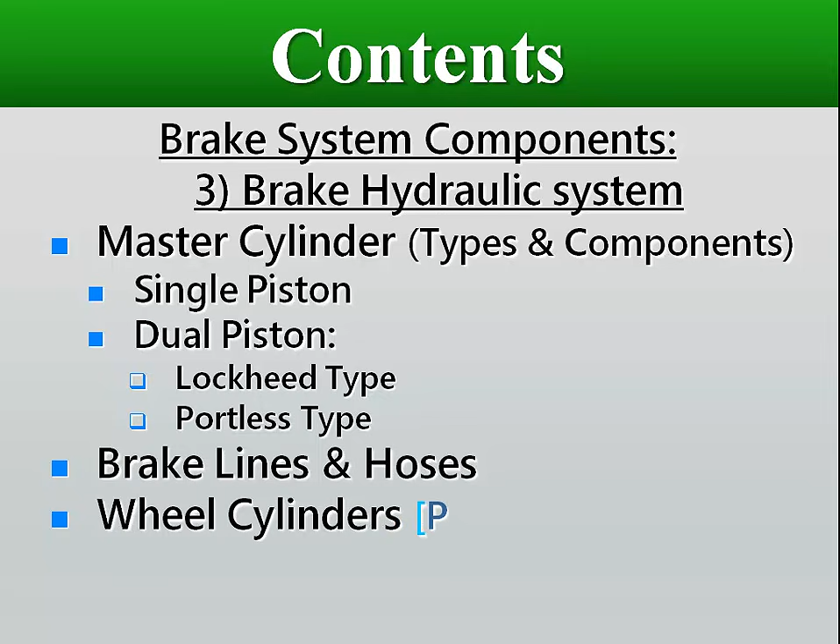Hydraulic systems are comprised of three basic parts: a master cylinder that pushes fluid through the lines that carry the fluid, and a slave cylinder that moves when fluid pressure pushes upon it.

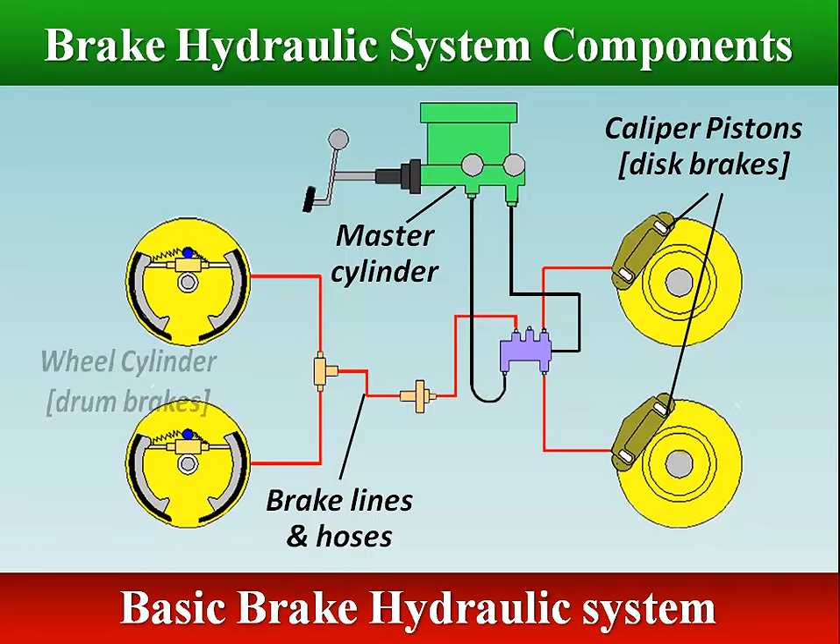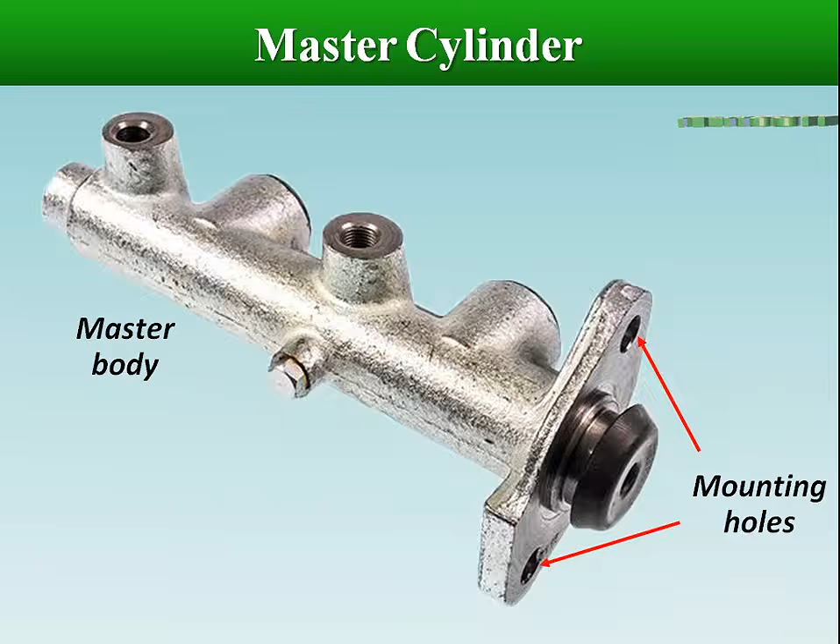The master cylinder is the heart of the entire braking system. It stores brake fluid and converts the motion of the brake pedal into hydraulic pressure. Most master cylinders are manufactured of cast iron or aluminum, and contain brackets with holes for mounting. The master cylinder is connected to the brake pedal via a push rod.

A single piston master cylinder consists of a reservoir, cylinder body, piston, and return spring.

The rubber seal of the reservoir cover allows for continuous pressure to be placed on the fluid, preventing the chance of a vacuum building inside the master cylinder reservoir.

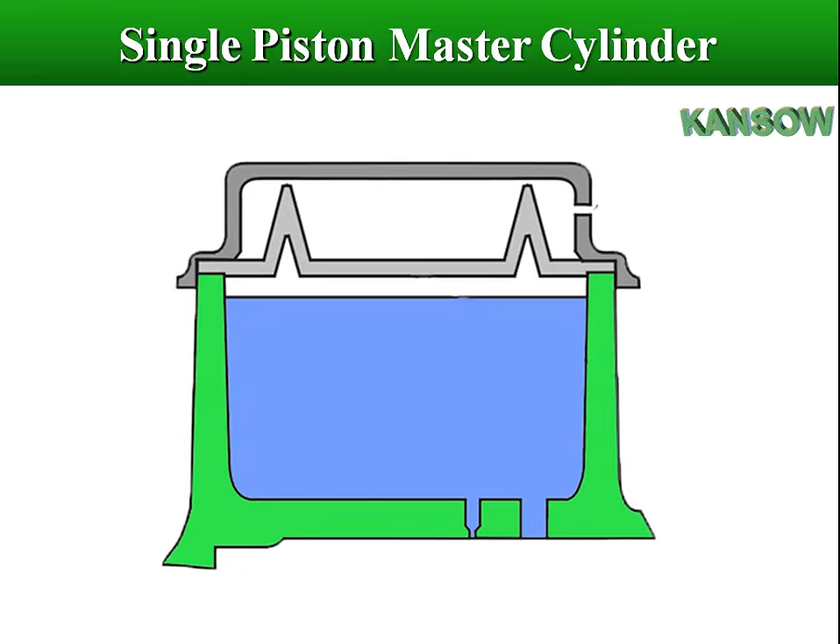Single piston master cylinders have one piston with two cups, a primary cup and a secondary cup. These cups are also known as seals.

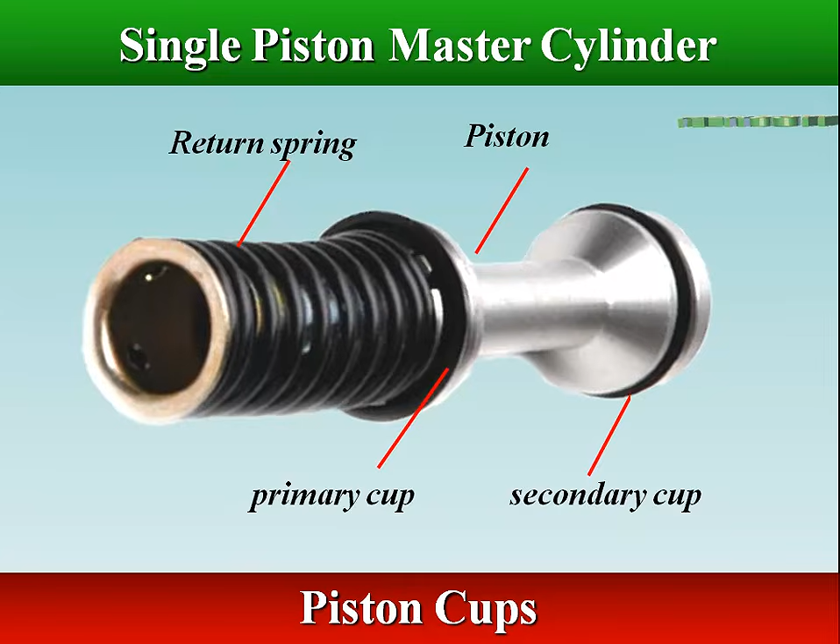When force is applied to the piston by the push rod, the primary cup seals the pressure in the cylinder, while the secondary cup prevents loss of fluid past the rear end of the piston.

An inlet port connects the reservoir with the space around the piston and between the piston cups. A compensating port connects the reservoir to the cylinder, just barely ahead of the primary cup. An outlet port links the cylinder to the brake lines.

The compensating port adjusts for changes in the volume of the brake fluid ahead of the piston. This occurs due to the expansion or contraction of the brake fluid as it heats up or cools down.

As the push rod from the brake pedal moves the piston forward, the compensating port is closed off, trapping brake fluid ahead of the primary cup. Fluid trapped in the cylinder is then forced from the master cylinder outlet port into the brake lines.

When the brakes are released, the master cylinder piston returns to its original position by action of the spring. When the piston fully returns against its stop, the primary cup uncovers the compensating port, and fluid ahead of the primary cup can now return to the reservoir.

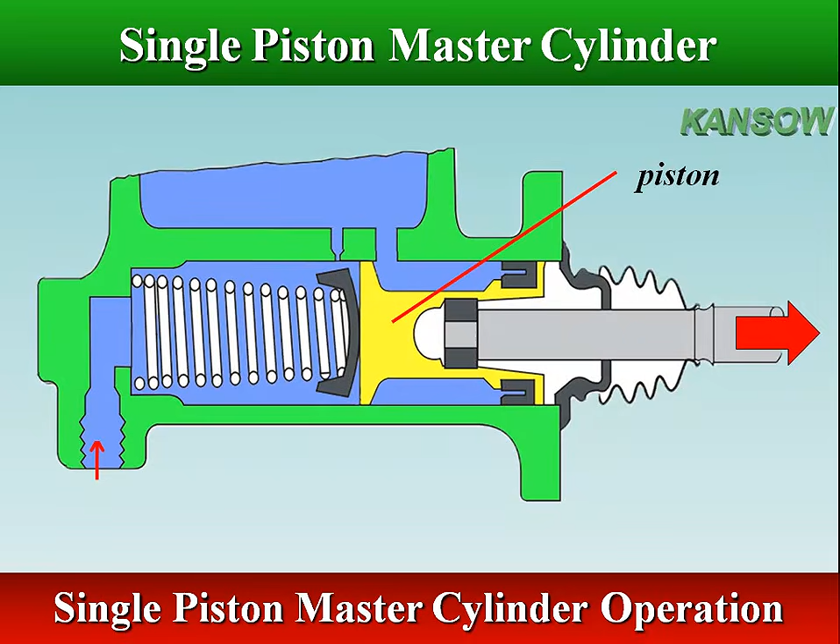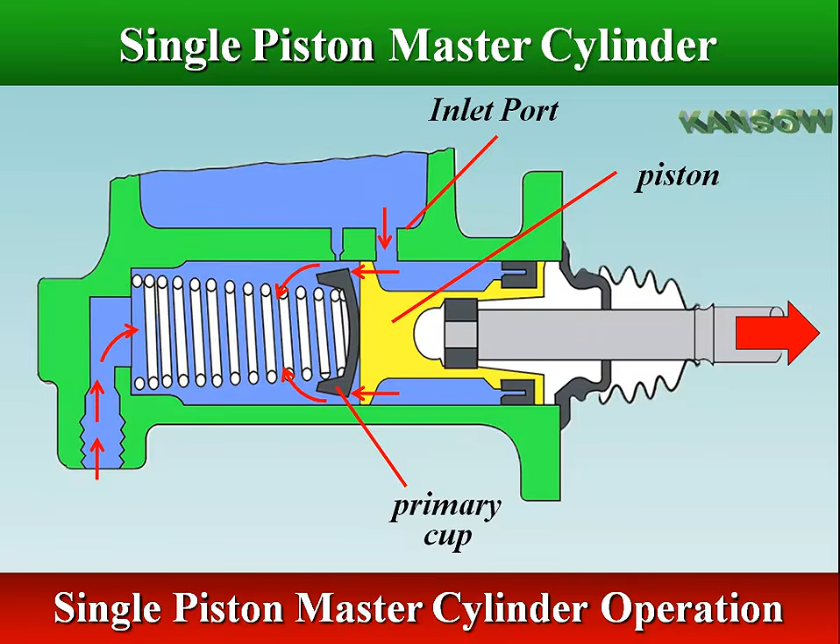When the brake pedal is released quickly, the piston returns back quickly, but the brake fluid cannot return as quickly to the cylinder, creating a low pressure area ahead of the primary cup. To prevent a vacuum from being created, fluid can pass from the reservoir into the working chamber, through the inlet port and small holes drilled in the piston land and around the primary cup seal. This is called recuperation.

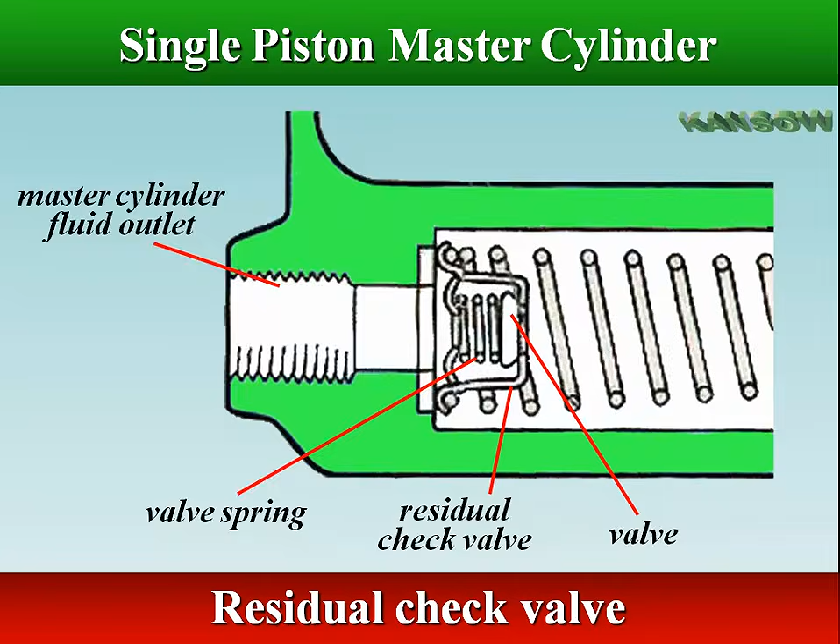When the fluid in the lines returns to rest, its pressure is held slightly above atmospheric pressure by a valve called the residual check valve, located at the outlet end of the master cylinder. The residual pressure helps stop air from entering at the wheel cylinder, and it keeps fluid from leaking out.

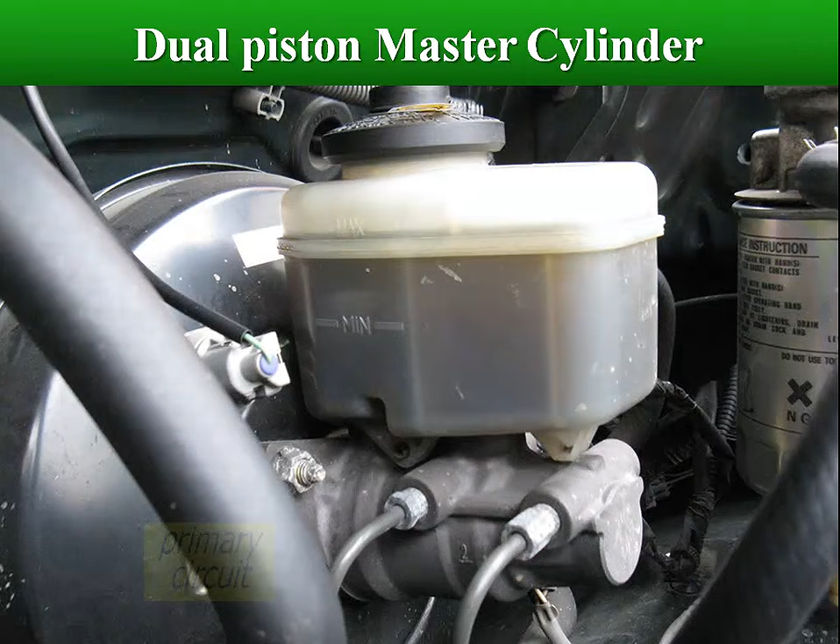The tandem master cylinder has two separate hydraulic chambers. This creates, in effect, two separate hydraulic braking circuits. If one of these circuits becomes inoperative, the other circuit can still function to stop the vehicle.

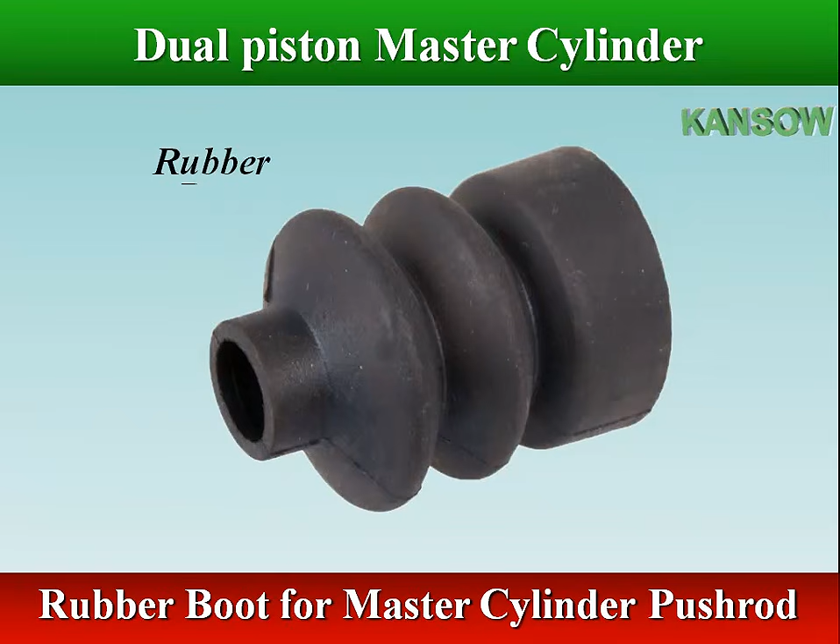The rubber boot for the master cylinder push rod prevents dust, dirt, and moisture from entering the back of the master cylinder. The master cylinder consists of the reservoir tank, which contains the brake fluid, and the pistons and cylinder which generate the hydraulic pressure.

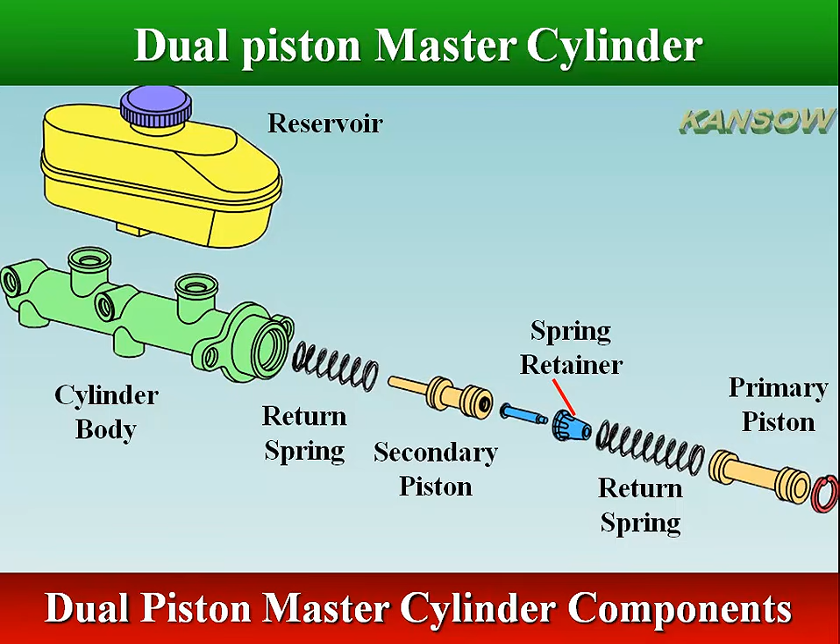The reservoir tank stores an extra supply of brake fluid, cast as part of the housing or added as a removable plastic part. The reservoir diaphragm lays directly on top of the brake fluid, which helps keep air from the surface of the brake fluid, because brake fluid easily absorbs moisture from the air.

There can be two separate fluid reservoirs for the primary and secondary chambers.

A tandem master cylinder having a single reservoir tank has a separator inside that divides the tank into front and rear parts. The two-part design of the reservoir ensures that if one circuit fails due to fluid leakage, the other circuit will still be available to stop the vehicle.

The tandem master cylinder has a single bore separated into two separate chambers by the primary and secondary pistons. This creates, in effect, two separate hydraulic braking circuits.

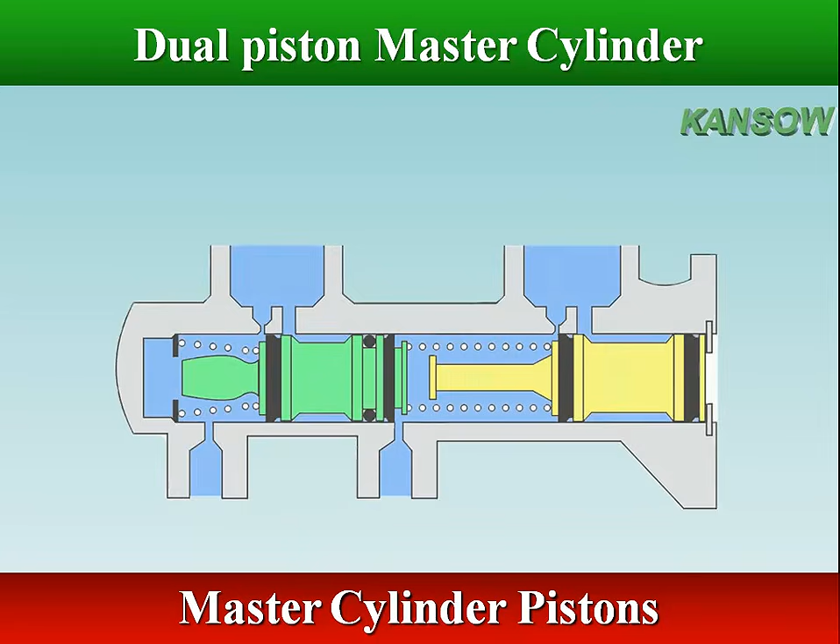Both piston assemblies rest in the cylinder. The primary piston assembly is retained by a snap ring in the end of the cylinder, and the secondary piston assembly is retained by a stop plate.

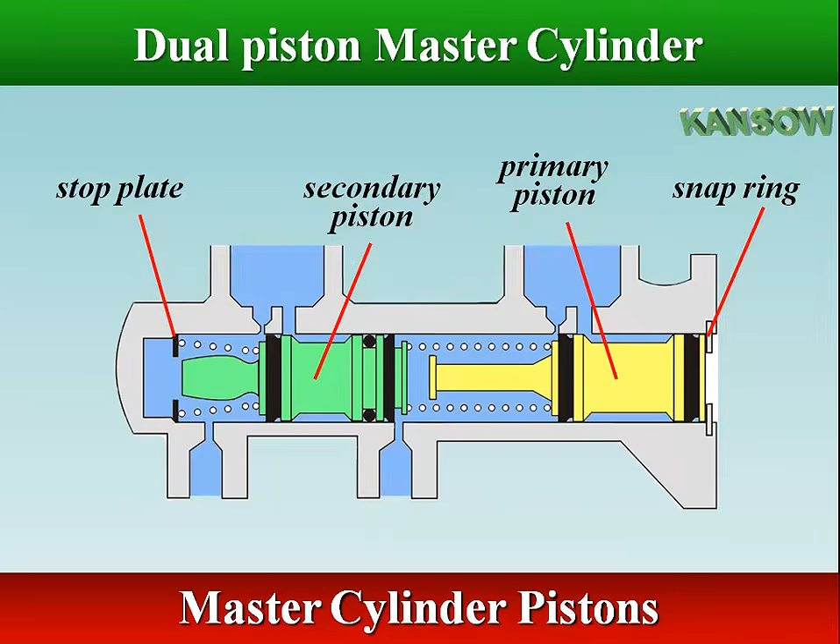Pistons and cups are used to pressurize the system. When they are pushed forward, they trap fluid and build pressure.

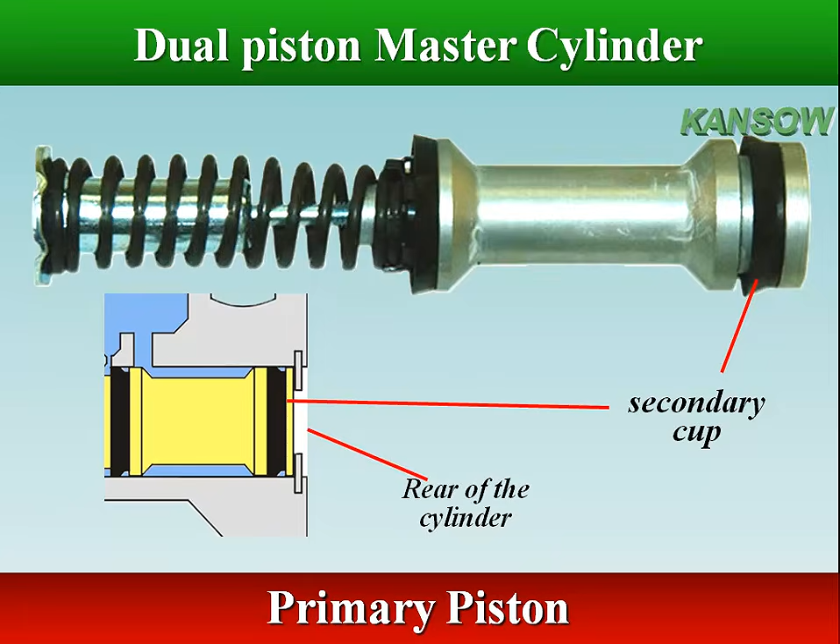The primary piston is acted on by the push rod. At the front of the primary piston is a rubber primary piston cup, which seals the primary circuit of the cylinder. At the rear of the primary piston is a secondary piston cup, which prevents brake fluid from leaking out of the rear of the cylinder. The inner piston head has several small bleeder ports that pass through the head to the base of the rubber primary cup.

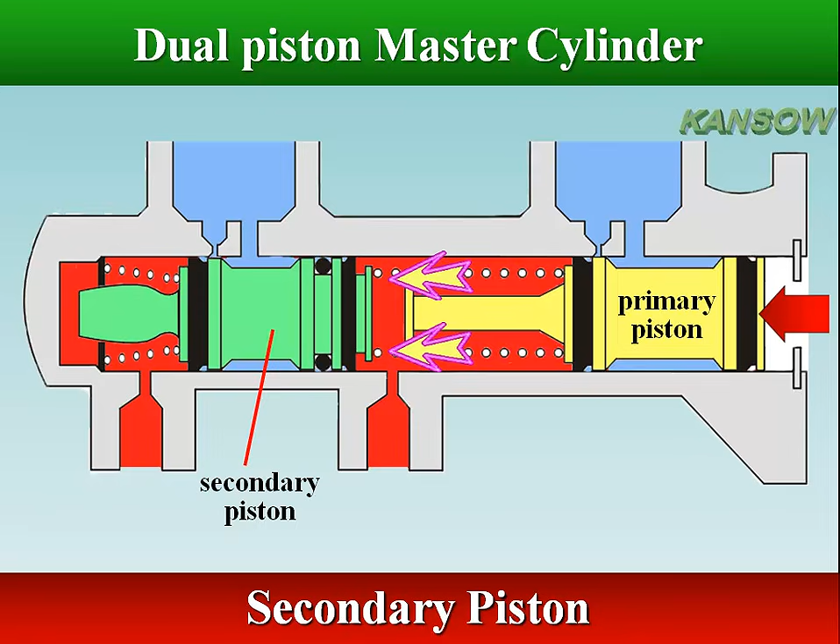The secondary piston is acted on by hydraulic pressure generated in the primary circuit when the brake is applied. At the front of the secondary piston is a primary piston cup which seals the secondary circuit, and at the rear are two secondary piston cups, which seal the secondary chamber cylinder from the primary chamber cylinder.

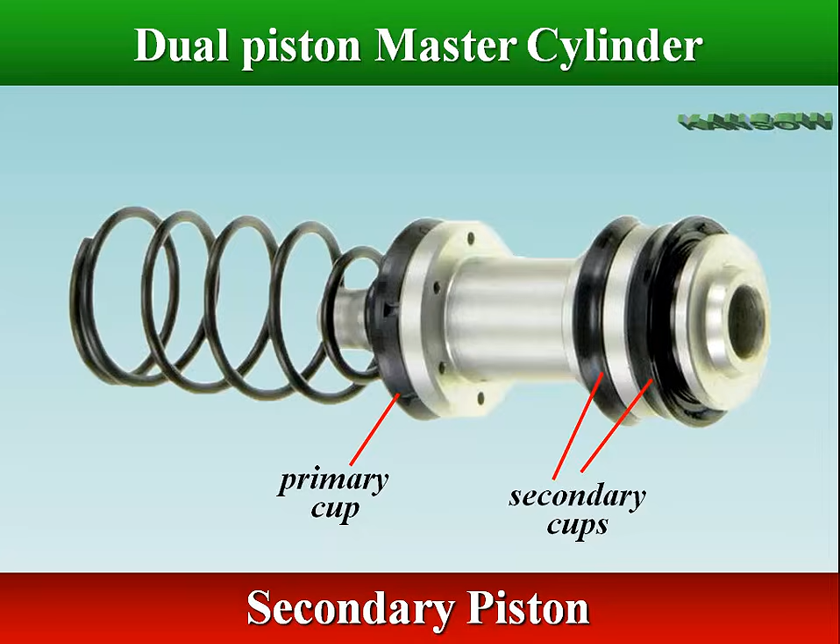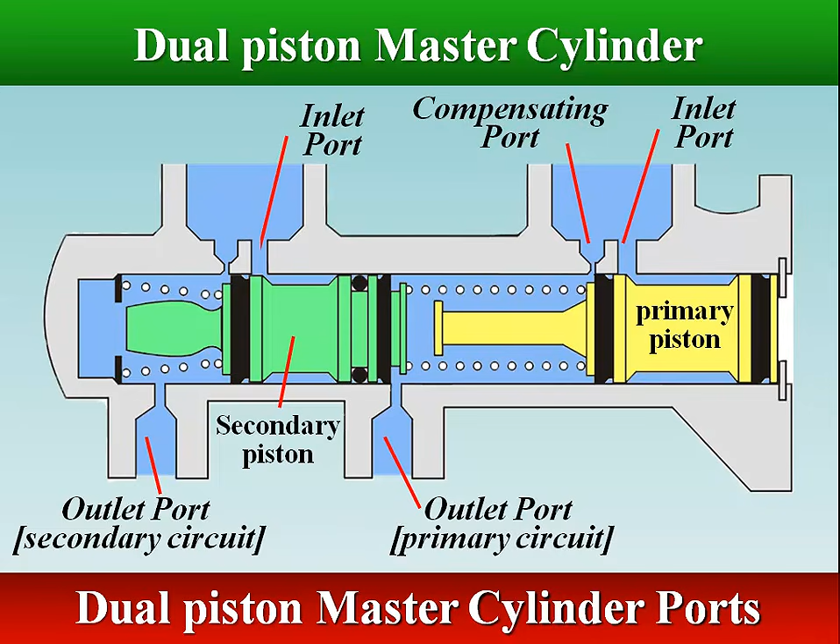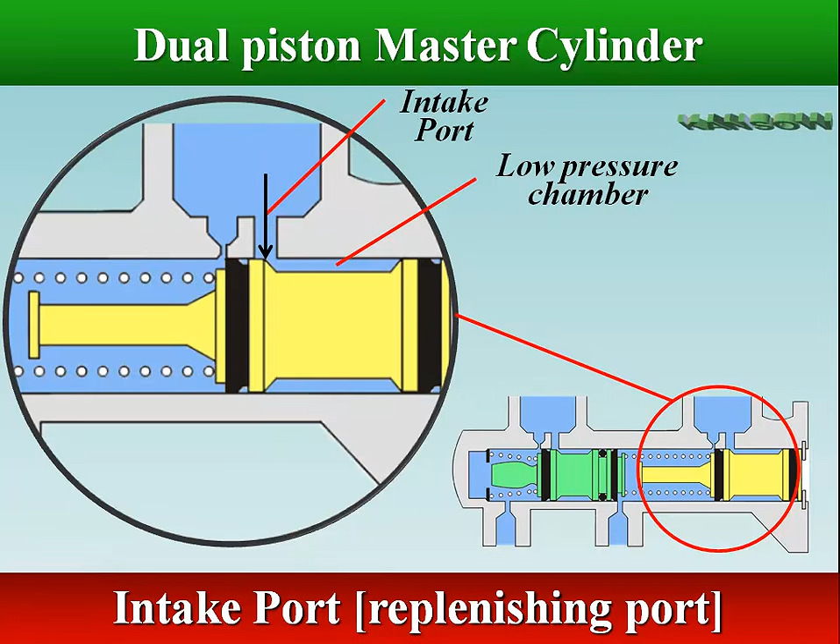Each piston of the master cylinder has an inlet port, compensating port, and outlet port. The intake port is the low-pressure rearward, larger diameter, straight drilled hole which is always open to the reservoir. It is also called the replenishing port, bypass port, filler port, or breather port. The intake port allows fluid from the reservoir to fill the low-pressure chamber, keeping the volume behind the front piston land filled with brake fluid as the piston moves forward during a brake application.

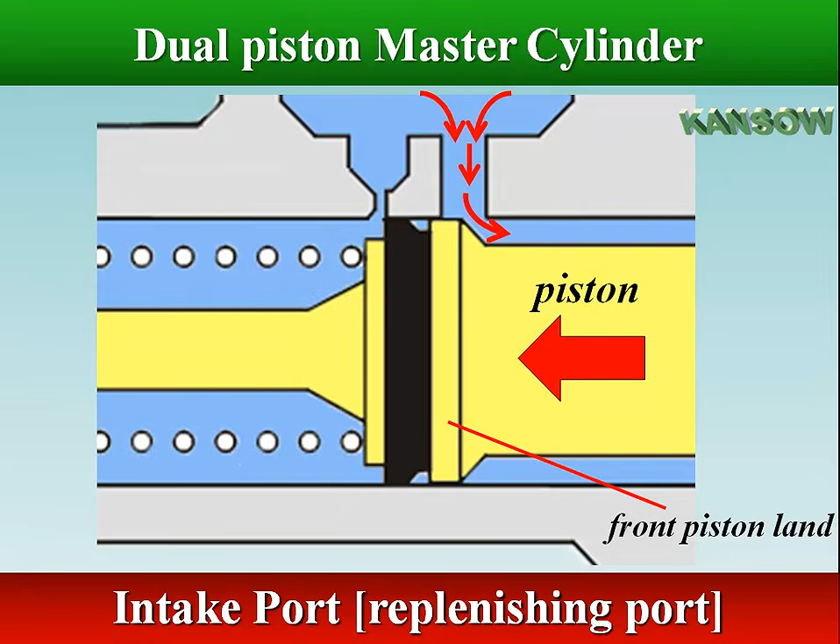The compensating port is the forward tapered hole, also called the vent port or high-pressure port. It allows fluid to flow into the chamber when the brake pedal is not depressed, and allows fluid to return to the reservoir when the brakes are released. The compensating port also absorbs any changes in brake fluid volume due to temperature changes.

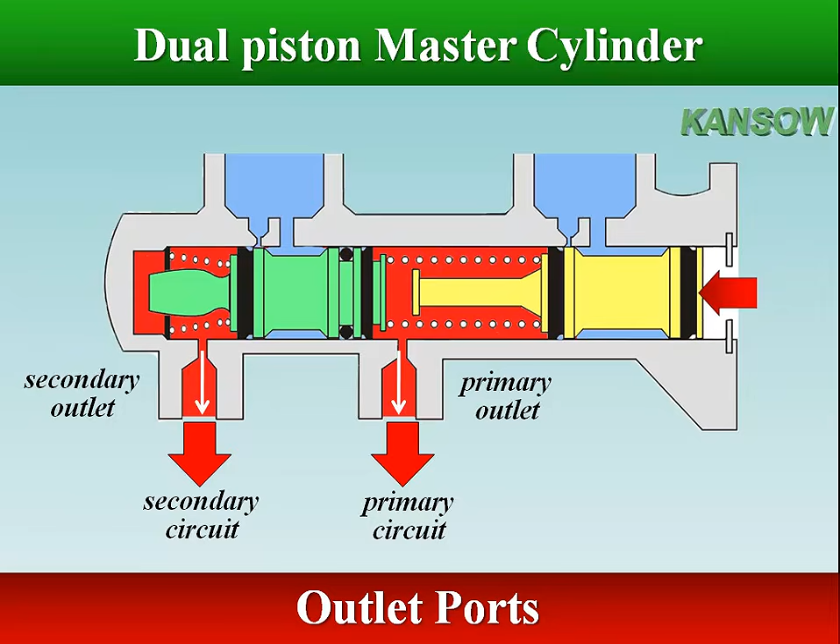The primary outlet is the outlet closest to the pushrod end of the master cylinder, and the secondary outlet is closest to the nose end of the master cylinder.

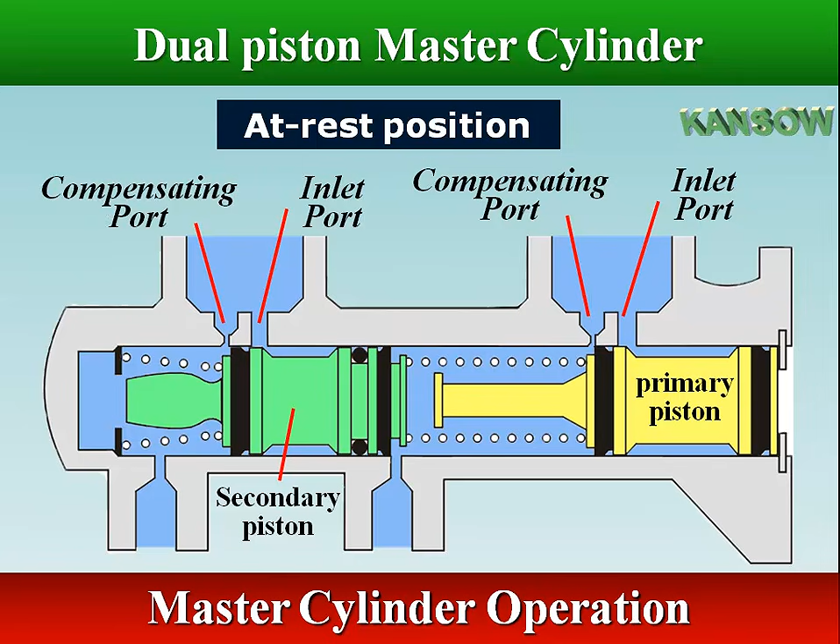When the brakes are not applied, the piston cups of the primary and secondary pistons are positioned between the inlet port and the compensating port. This provides a passage between the cylinder and the reservoir tank.

When the brake is applied, the primary piston moves forward and blocks off its compensating port, sealing the fluid in front of it. As the piston continues to move forward, it transmits fluid pressure to the primary circuit and to the base of the secondary piston. This causes the secondary piston to move forward, block off its compensating port, and apply pressure to the secondary circuit.

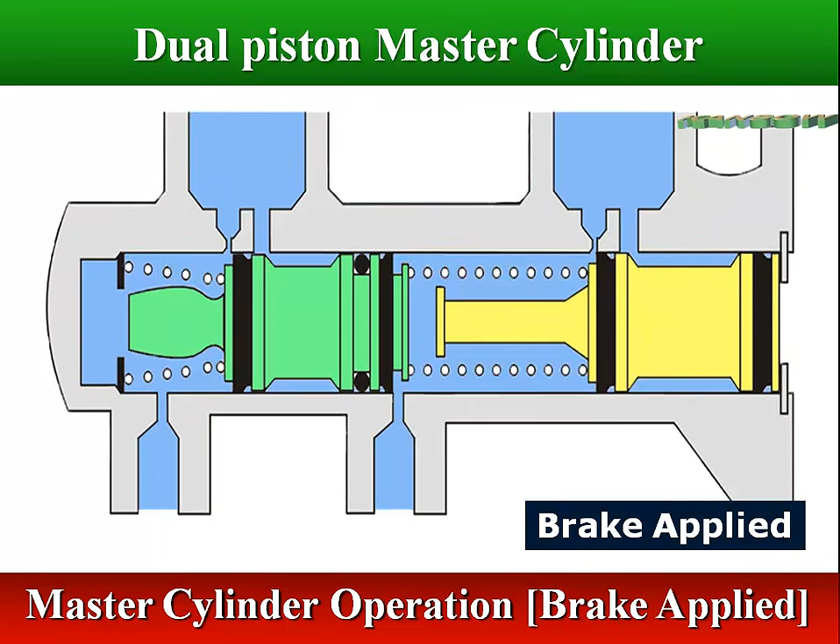When the brake pedal is released, the pistons are moved rearward by hydraulic pressure and the force of the return springs. As the pistons start to move outward in the cylinder, they move faster than the fluid can return through the lines. This creates a mild vacuum in the pressure chambers, and fluid will flow through the bleeder holes in the head of the pistons. This fluid will bend the lips of the cups away from the cylinder wall, and fluid will flow into the cylinder ahead of the pistons.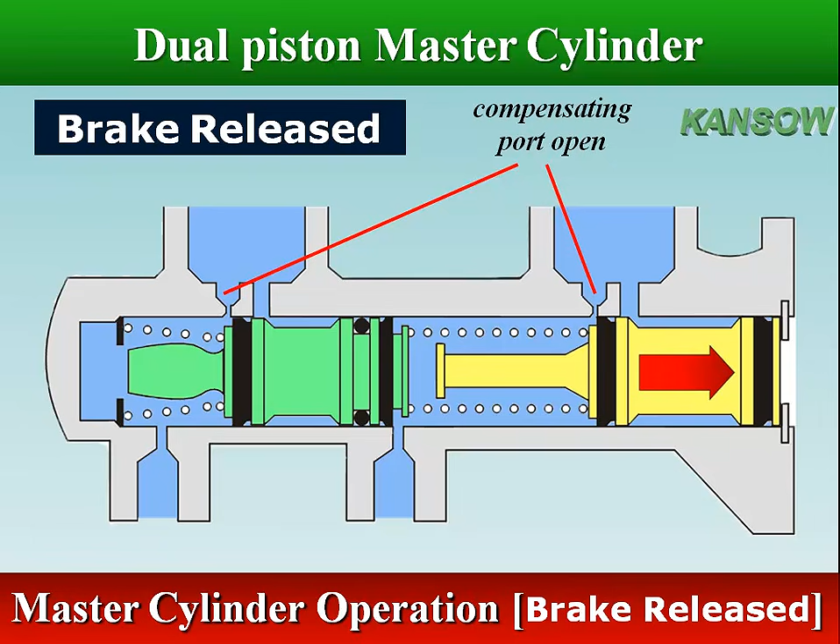This action also allows brakes to be pumped up, that is, the repeated application of the pedal in quick movements. As the pistons return to their fully released position, the primary cups uncover the compensating ports, and any excess fluid will flow into the reservoir.

If there is a failure in the secondary circuit, the hydraulic pressure in the primary chamber easily forces the secondary piston to the left, compressing the return spring. The secondary piston advances until it reaches the far end of the cylinder. The primary piston will then apply normal pressure to the primary circuit.

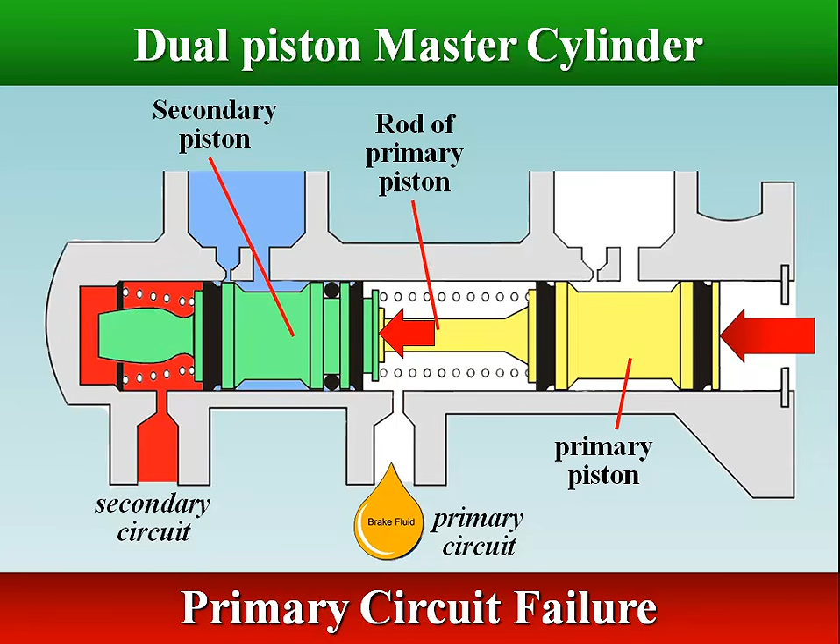If the primary circuit fails, additional pedal movement will cause the rod attached to the front of the primary piston to mechanically move the secondary piston forward, transmitting normal brake pressure to the secondary circuit.

Lockheed type master cylinders use a compensating port on both the secondary and primary circuits. A new style master cylinder is used on late model vehicles equipped with ABS and ABS traction control.

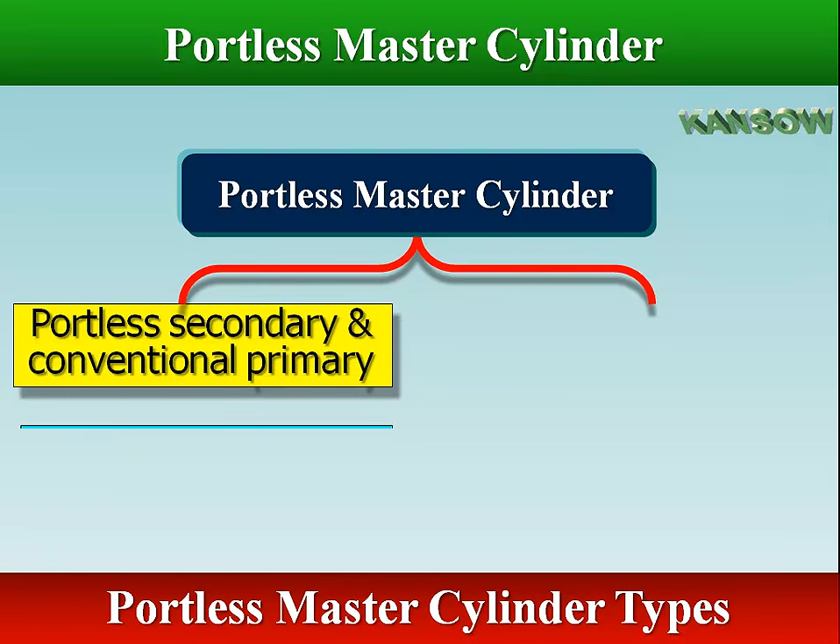A portless ABS master cylinder design does not use a compensating port on the secondary circuit, so there is a non-restrictive single passage from the reservoir to the secondary piston. The primary piston still uses a compensating port and an inlet port.

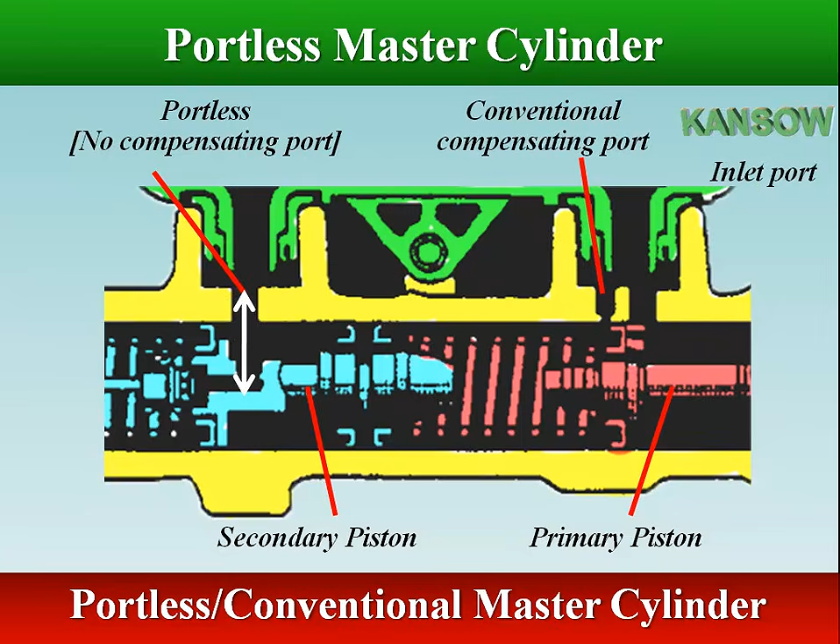The secondary piston provides a machined passage to the secondary circuit which is controlled with a center valve that controls the opening and closing of a supply port drilled into the piston. This supply port replaces the compensating port in a normal master cylinder. Portless cylinders utilize a valve assembly in the pistons that opens to equalize pressure when the brakes are released.

At rest position, the supply port is open and connects the reservoir with the secondary brake circuits. When the brakes are applied, the primary piston moves and closes its compensating port. Brake fluid pressure in the primary circuit rises and acts with the primary piston spring to move the secondary piston forward. The secondary piston moves and the center valve closes the supply port. When the piston moves further, hydraulic pressure is created in the secondary circuit.

When the brakes are released, the springs in the master cylinder push both pistons back. The supply port is open and thus the center valve creates a passage between the valve head and the secondary piston. Through this small passage brake fluid can flow back to the reservoir.

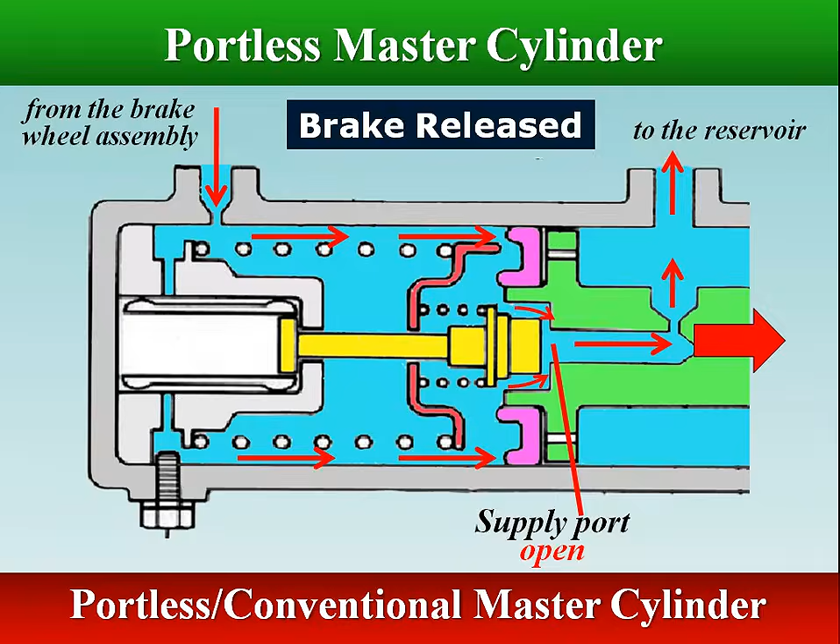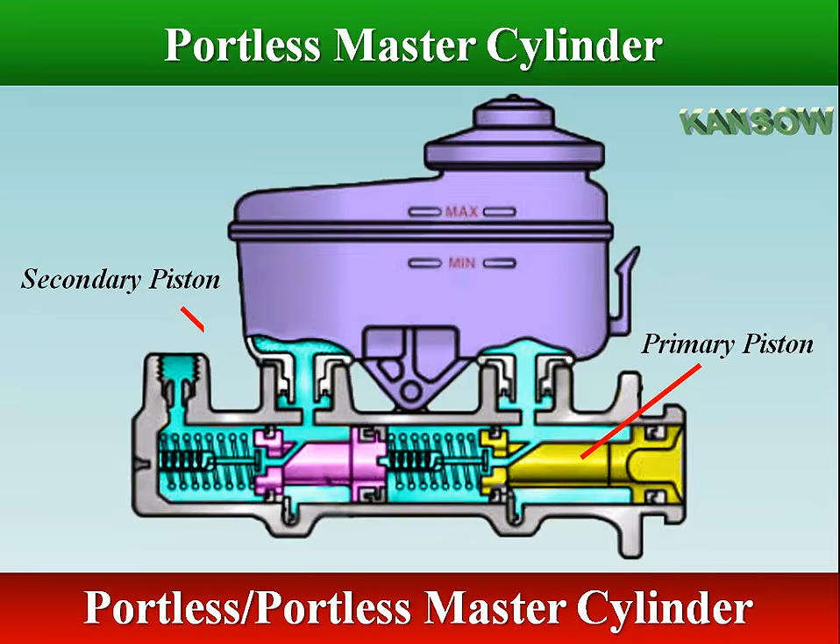Portless ABS traction control master cylinder design does not use a compensating port on both the primary and secondary circuits. Each of the primary piston and the secondary piston have a center valve.

Brake hydraulic components are connected by a network of seamless steel tubes and hoses, which transfer fluid pressure from the master cylinder to the wheel brake assemblies.

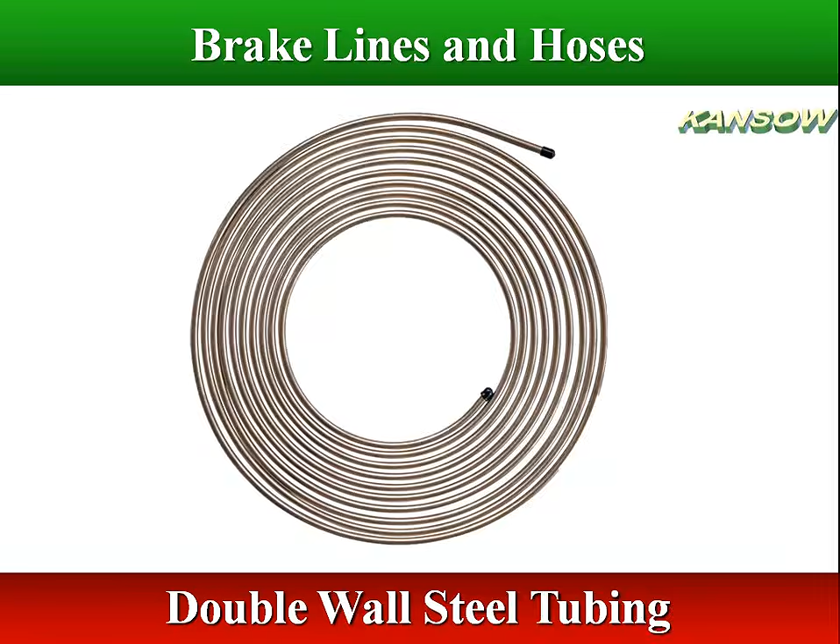The brake lines are made of double-wall steel tubing, copper plated and lead coated to prevent rust and corrosion. Each end of brake tubing is a double-lap flare, fitted with a flare nut. The tapered seats and double flare tube provide a compression fitting to seal the connection.

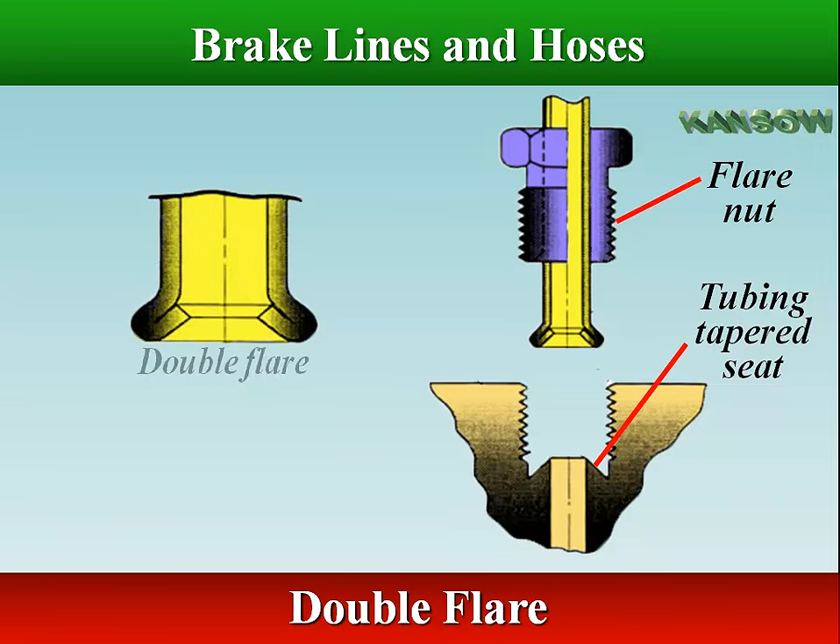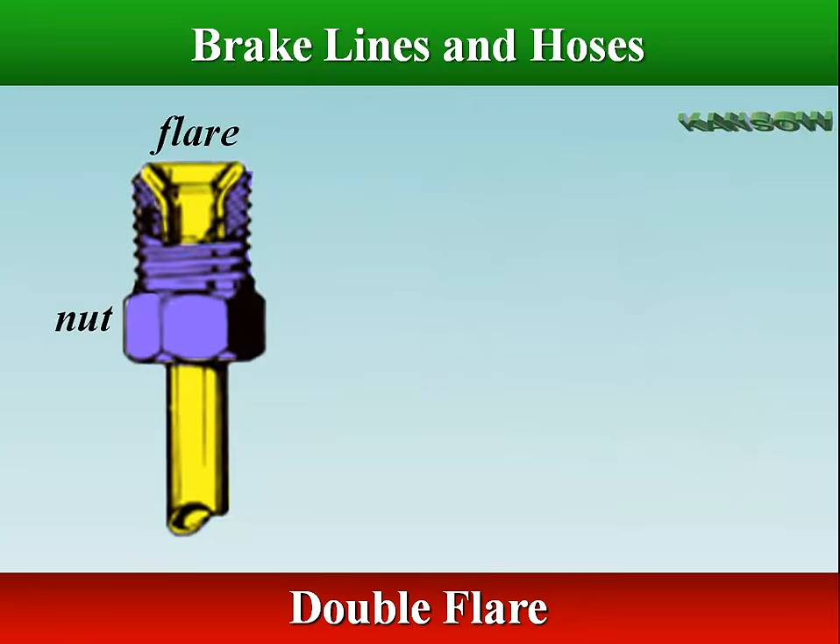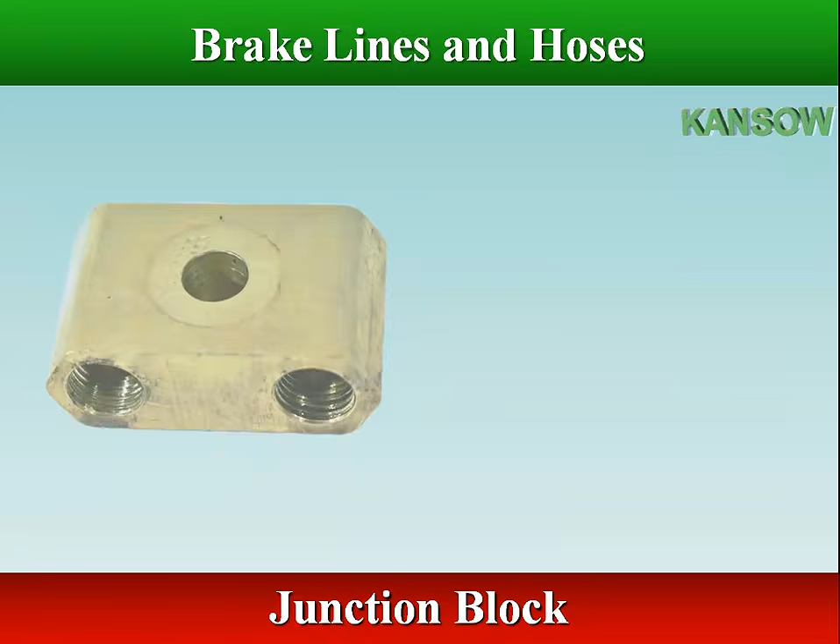A junction block is used where a single brake line must feed two wheel cylinders or calipers. It is simply a hollow fitting with one inlet and two or more outlets.

Rubber brake hoses are used where a flexing action is required. For example, a brake hose is used between the frame and the front wheel cylinders or disc brake calipers. This design allows the wheels to move up and down, as well as side to side, without damaging the brake line.

Mounting brackets and clips are used to secure brake lines and hoses to the body or frame of the vehicle, to prevent damage from vibration.

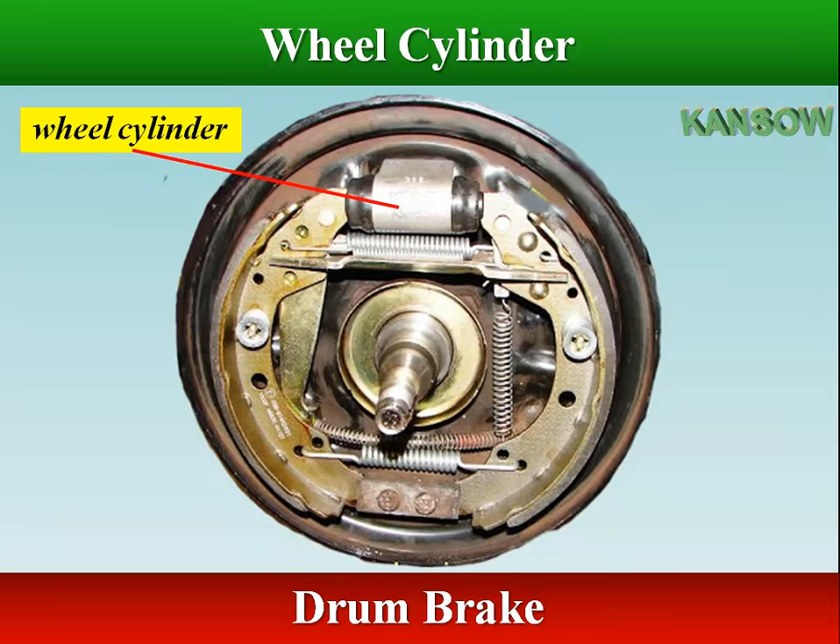A wheel cylinder is a component in a hydraulic drum brake system, located in each wheel. The wheel cylinder is usually positioned at the top of the backing plate, above the shoes.

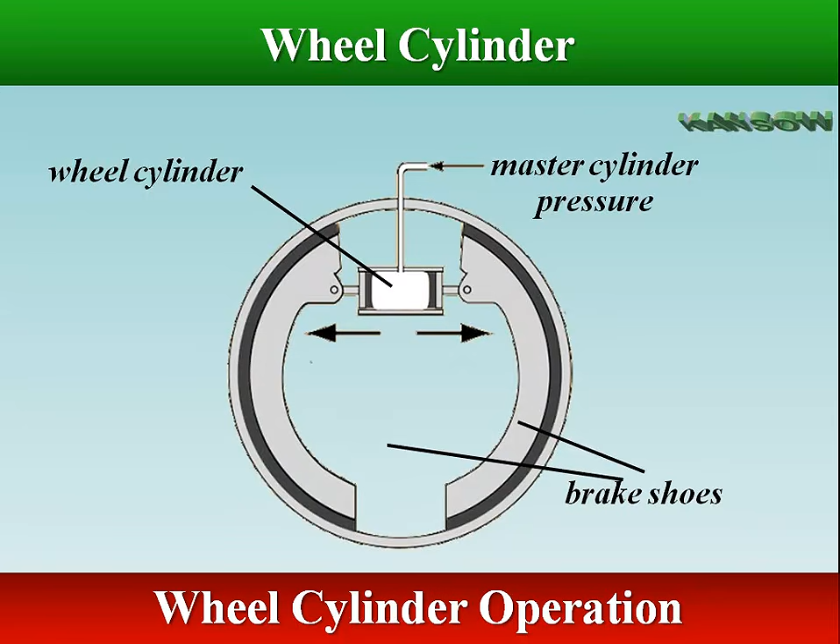The wheel cylinder uses master cylinder pressure to force the brake shoes out against the drum, and stop the vehicle with friction.

On the back of each wheel cylinder there is a threaded hole for the brake line, and a bleeder valve that can be loosened to bleed air from the hydraulic system.

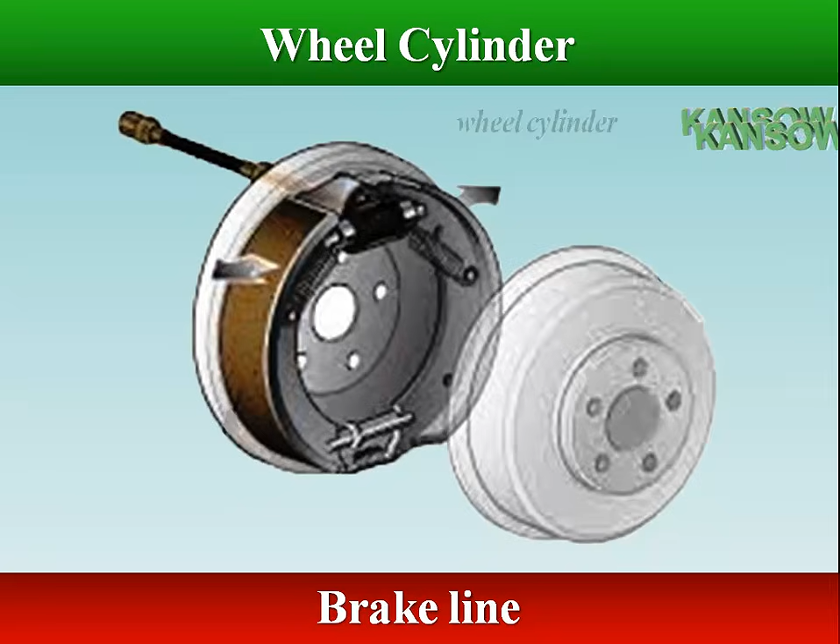The wheel cylinder is bolted or clipped to the backing plate.

The wheel cylinder consists of a cylinder housing, pistons, rubber cups, spring and cup expander assembly, dust boots, and bleeder screw.

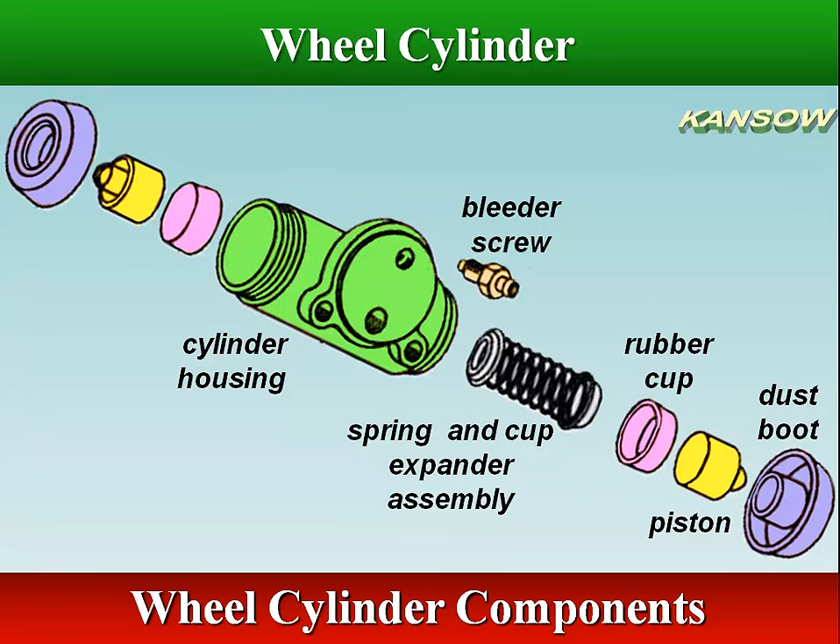The wheel cylinder housing encloses all the other parts of the assembly. It has a precision cylinder in it for the pistons, cups, and spring.

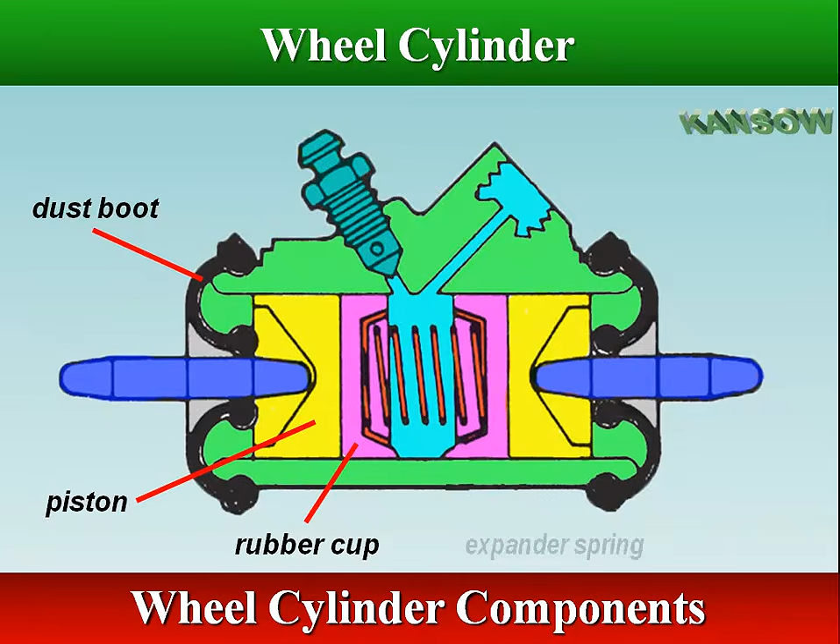Wheel cylinder has two pistons, one on each side. Each piston has a rubber seal and a shaft, or push rod, that connects the piston with a brake shoe.

The wheel cylinder cups are special rubber seals that keep fluid from leaking past the pistons. They fit in the cylinder and against the pistons.

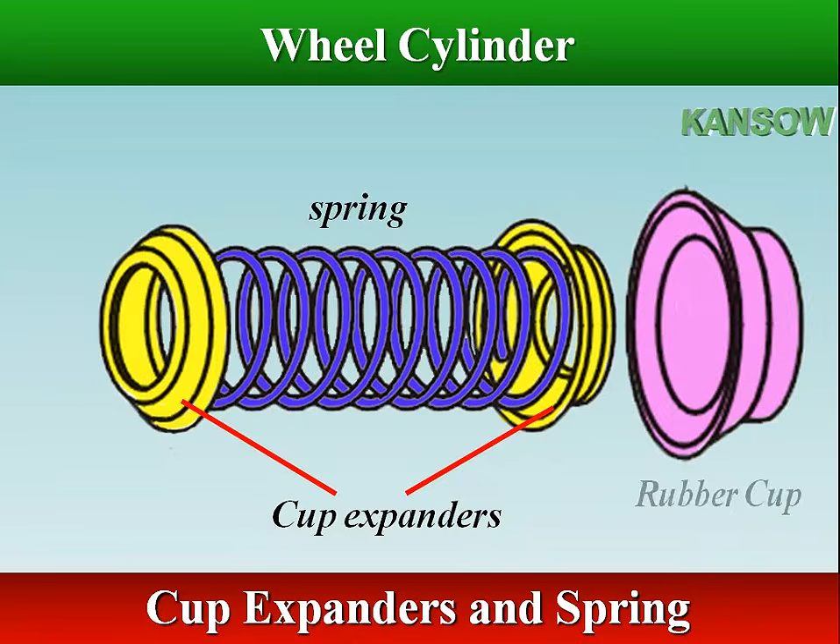The expander spring assists in holding the rubber cups against the pistons when the assembly is not pressurized. Cup expanders maintain pressure on the lips of the cup seal, keeping air, dirt, and moisture out of the system.

The dust boots keep road dirt and water from entering the cylinder. They snap into grooves that are cast on the outside of the housing.

The push rods are held in place by the rubber dust boots. As the wheel cylinder pistons move outward, the push rods transfer the movement to the brake shoes.

The bleeder screw is usually positioned to be the highest point on the cylinder. This aids in bleeding air from the system.

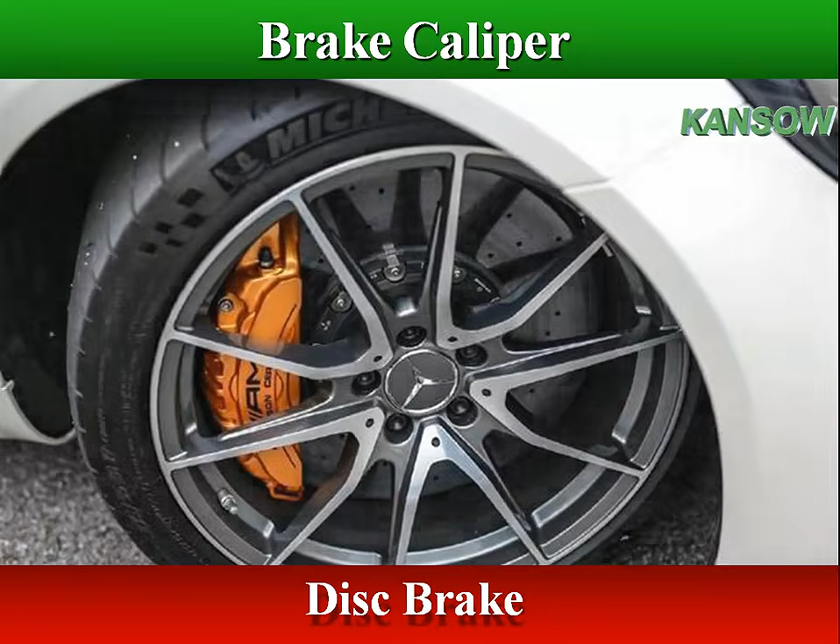The caliper is the part of a disc brake that squeezes the pads against both sides of the rotor, when the brake is applied.

Disc brake caliper assembly is bolted to the vehicle axle housing or suspension.

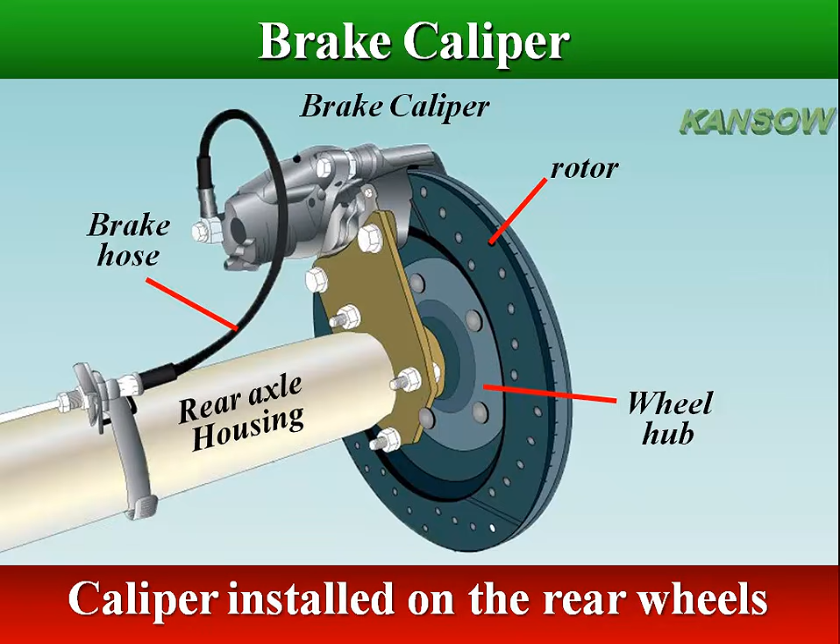Brake calipers have two functions in a motor vehicle: they house and guide the brake pads, and they provide the hydraulic actuation.

They house and guide the brake pads, ensuring every time you apply the brakes, the brake pads are in the right position to move onto the rotor.

Brake calipers provide the hydraulic actuation that converts brake fluid pressure into mechanical movement, enabling the braking action.

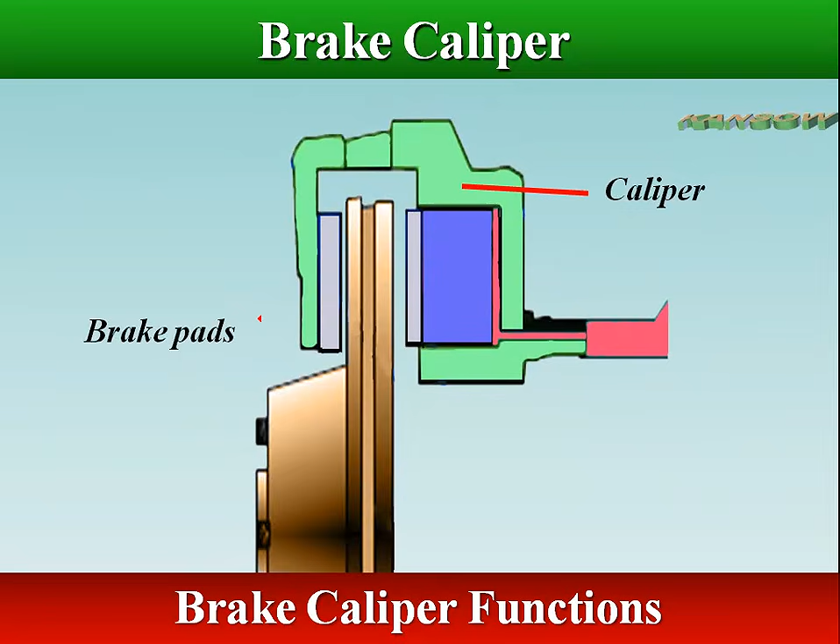While there are several designs for brake calipers, the most common type is the floating caliper. The floating caliper has two main sections: caliper bracket and caliper body.

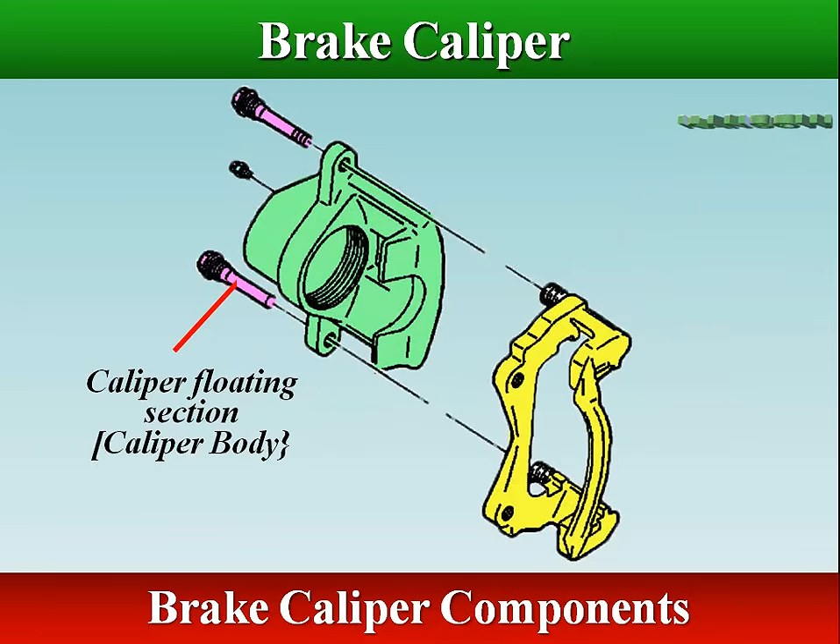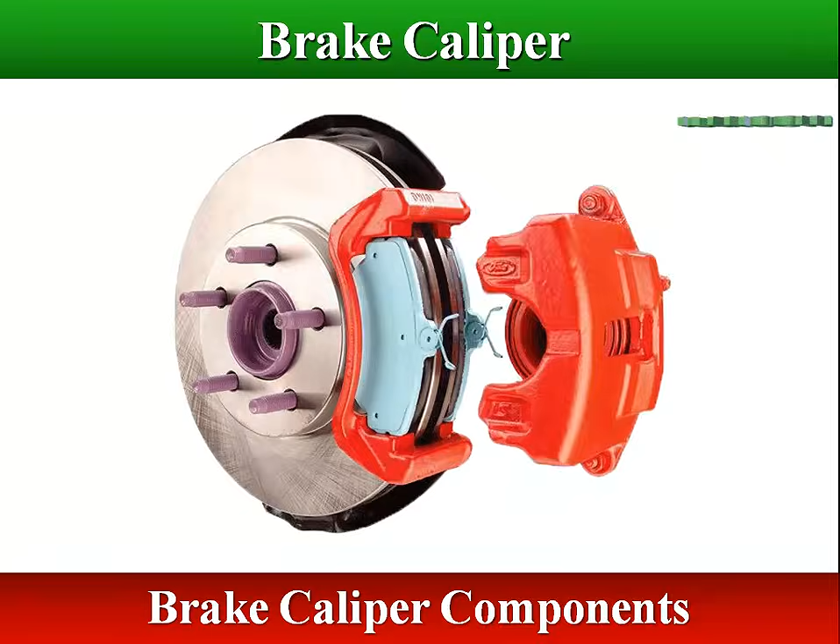The floating caliper bracket solidly mounts to a suspension component with two bolts.

The floating section is bolted to two pins called slide pins or guide pins, that let it slide freely from side to side, float.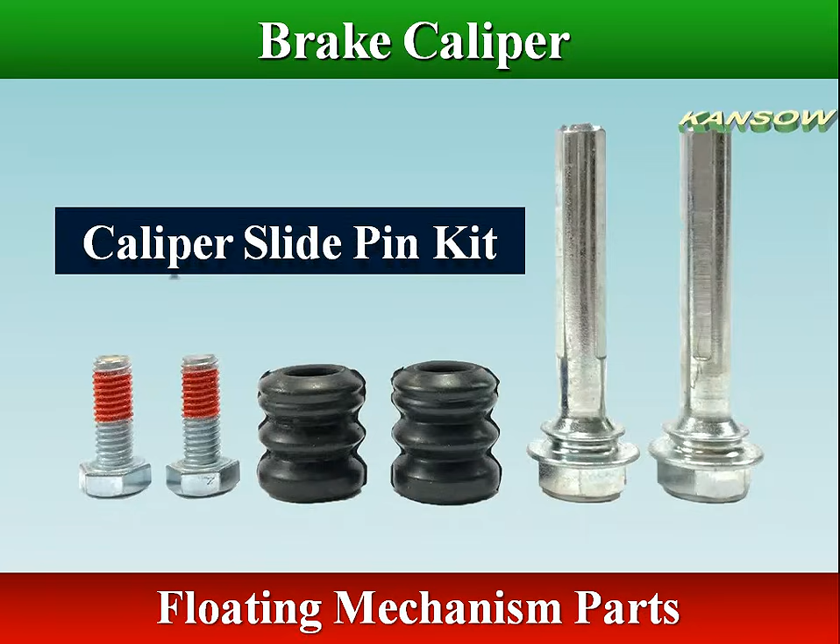The floating mechanism provides a gap between the brake pad and the rotor, and it includes sliding pins which are supported by rubber bushings. The mechanism is used to retain and locate floating calipers.

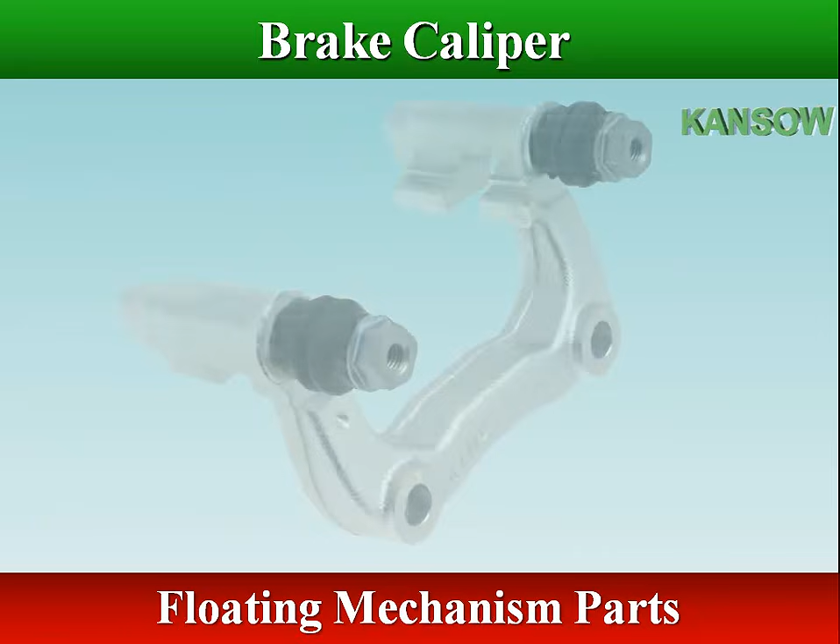The sliding pins are greased and allow for proper alignment of the caliper to the brake rotor, and still allow for the movement needed under normal driving.

The slide pin boot's job is to keep water, sand, and dirt away from the slide pin bores, and helps keep the special grease inside.

The slide pin reciprocates in the bushing during operation of the brakes, and the bushing moves along the bore as the brake pads wear.

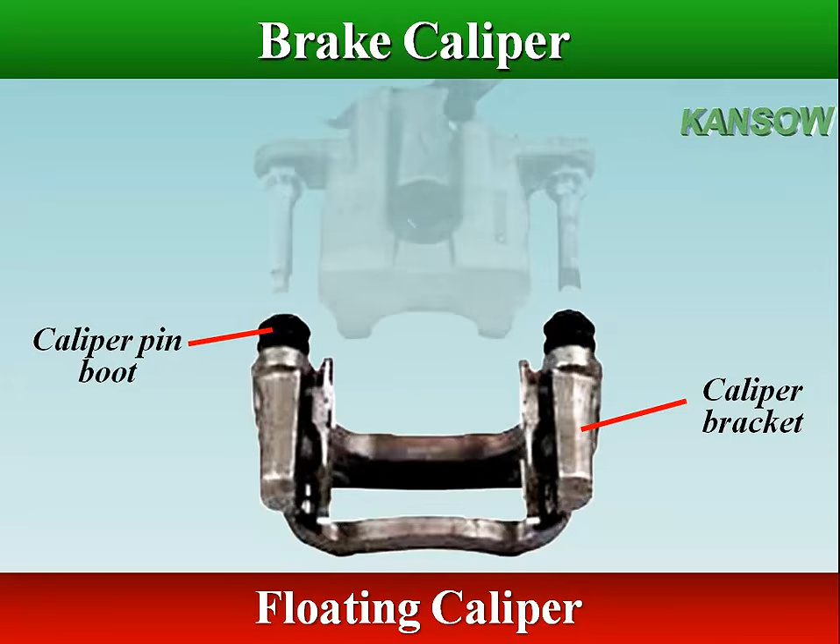The brake caliper body is composed of caliper housing, piston, square cut seal, dust boot, and bleeder screw.

The caliper body holds all of the parts of the brake caliper together, and floats to allow both application of the brake pads as well as the ability to release the brakes.

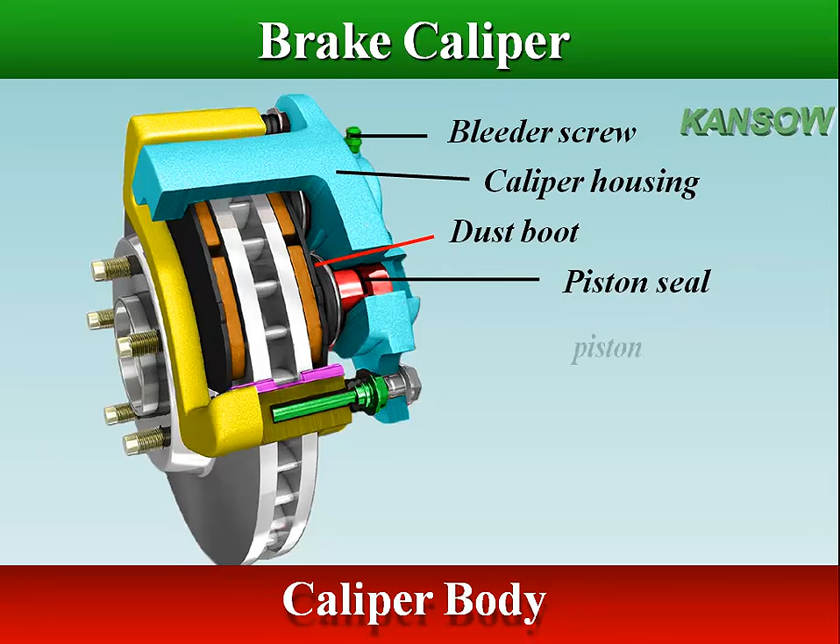Caliper cylinder is a machined hole in the caliper housing. The piston fits into this cylinder.

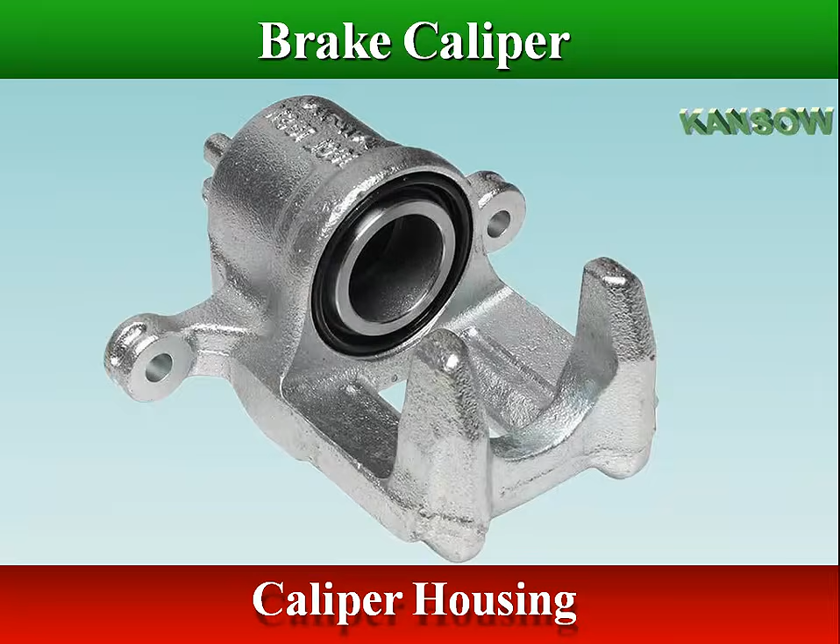The caliper cylinders have grooves machined into their surfaces to hold seals.

The caliper cylinder is connected to the hydraulic brake line system.

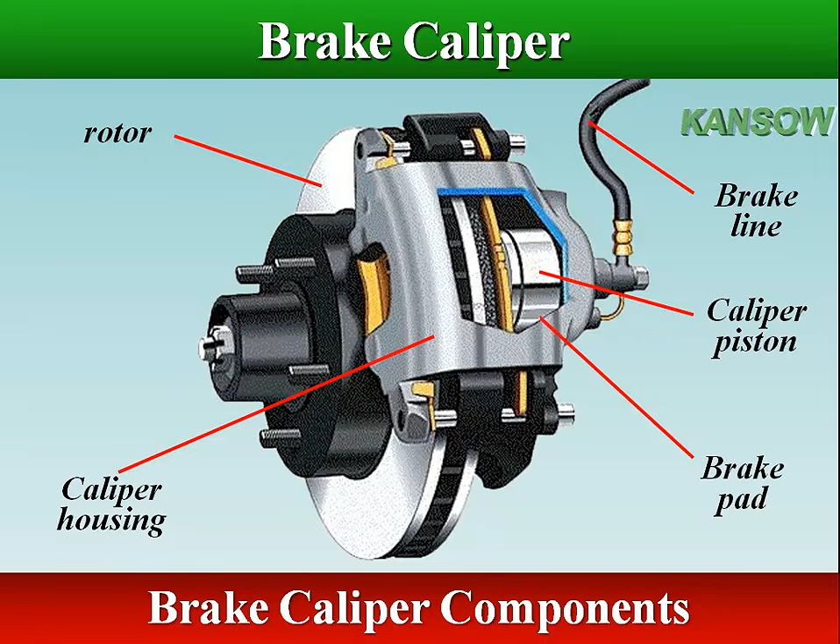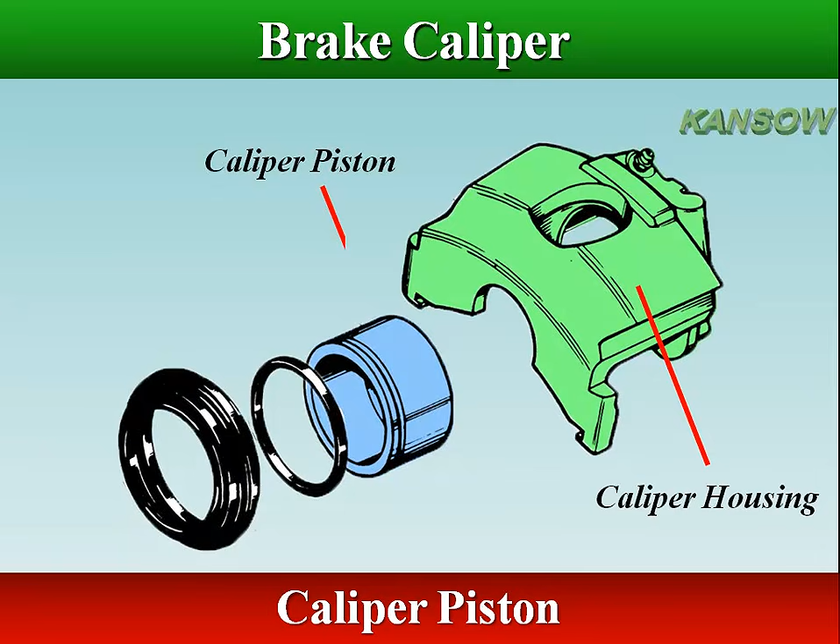Floating caliper has one or more pistons, located on the inboard side of the caliper. When the brake is applied, the piston is pushed by the brake fluid to close the gap between the brake pads and the brake rotor.

Caliper pistons may be aluminum, steel, or phenolic plastic.

The square-cut O-ring not only seals hydraulic brake fluid, but also retracts the caliper piston when the brake pedal is released.

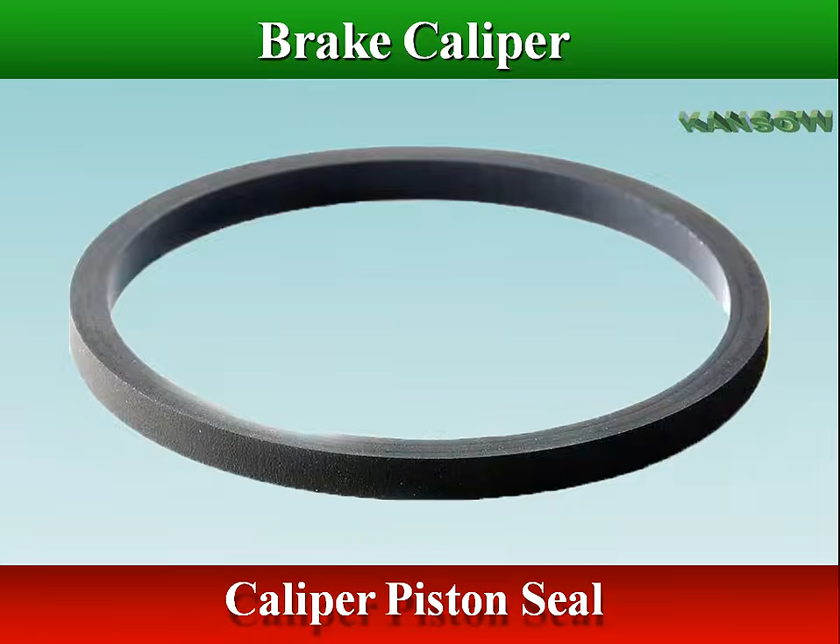The square-cut O-ring deforms when the brakes are applied, and returns the piston to its original position when released, due to the elastic properties of the rubber seal.

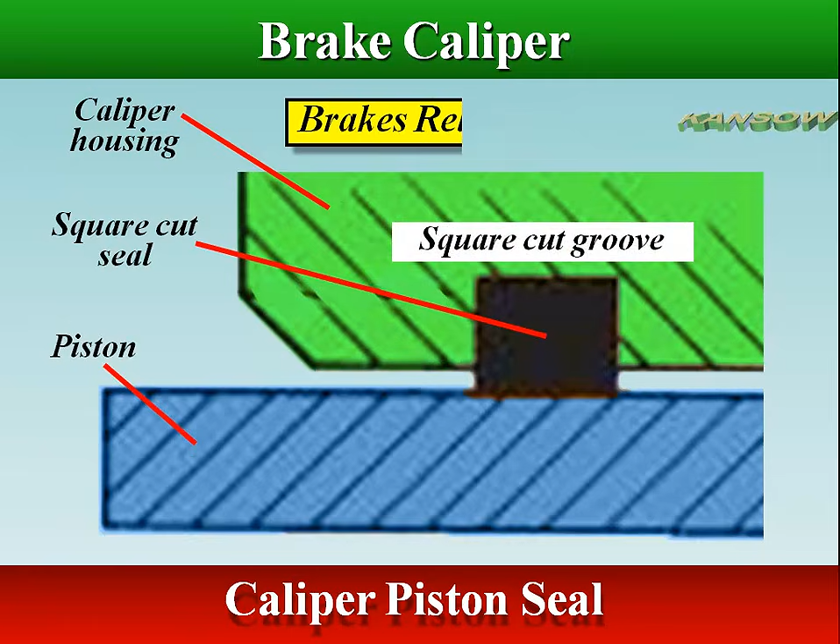The square-cut groove for the square-cut O-ring allows for more retraction. When the brake pedal is released, the piston is moved away from the rotor farther, resulting in less friction between the disc brake pads and the rotor when the brakes are released.

Caliper piston seal flexes in its groove, making it act like a return spring for the pads to provide running clearance.

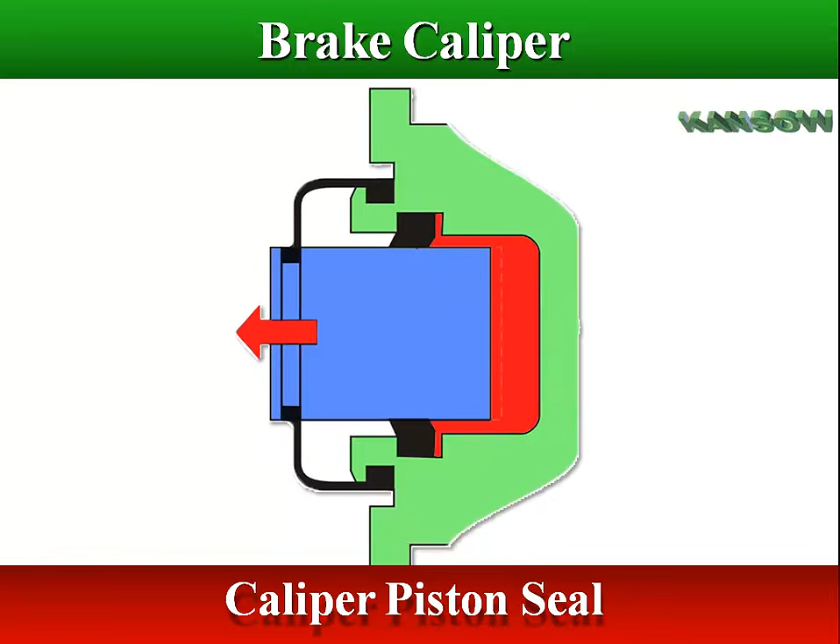Piston dust boot prevents contaminants, such as dust and debris, from entering the piston cylinder.

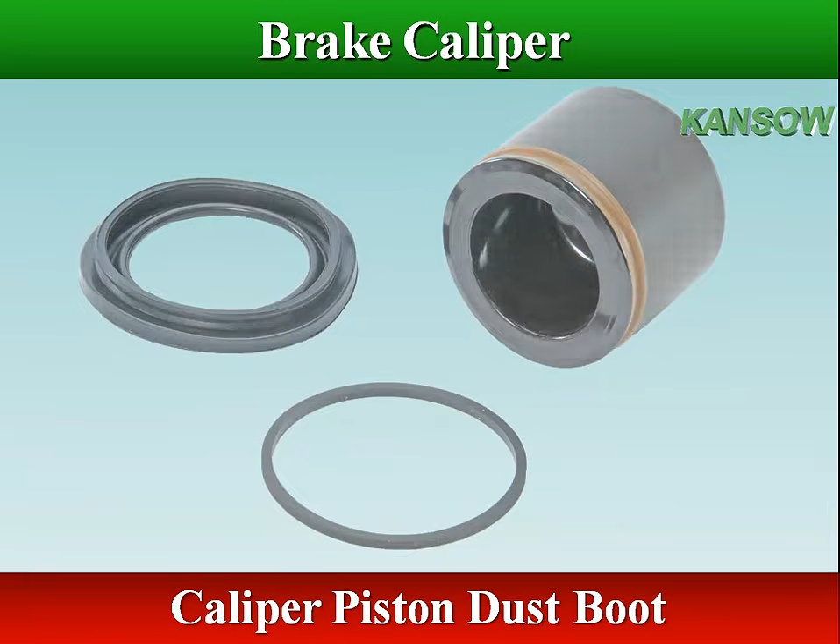A bleeder screw lets you remove air from the brake lines, bleed, when replacing the braking fluid or carrying out other caliper servicing tasks.

The bleeder screw seals at the bottom of its bore. The fluid passage in the middle of the screw reduces its strength, making it easy to twist off.